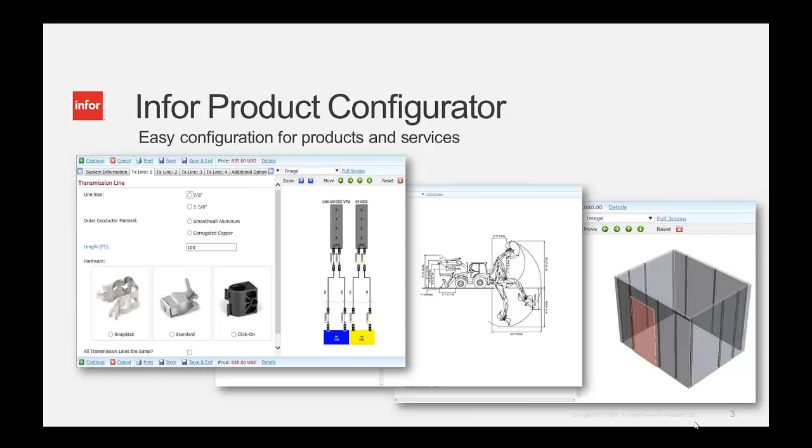The next part we'll take a look at is that the product configurator is very easy to use in the context of building models. On the right-hand side, we can see the modeling environment, where the configuration model is created to provide the presentation to the user.

In this case, this happens to be a door, and this is the example we'll use in our demonstration today. An enterprise-wide solution that provides a very easy-to-use configuration modeling environment to quickly bring new products or product offerings into the marketplace, helping gain market share.

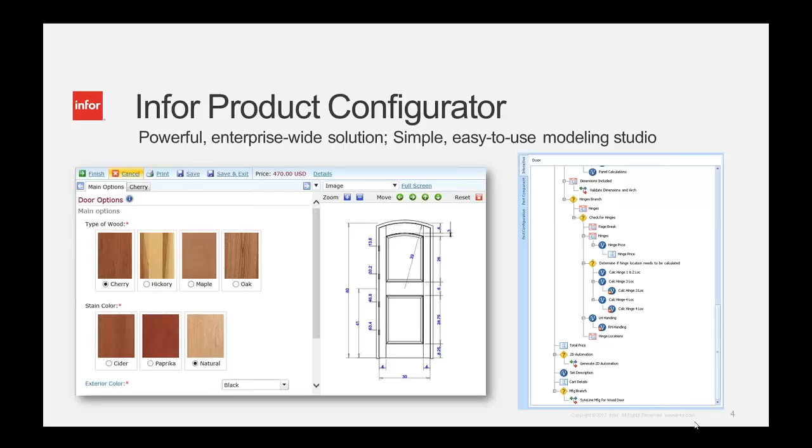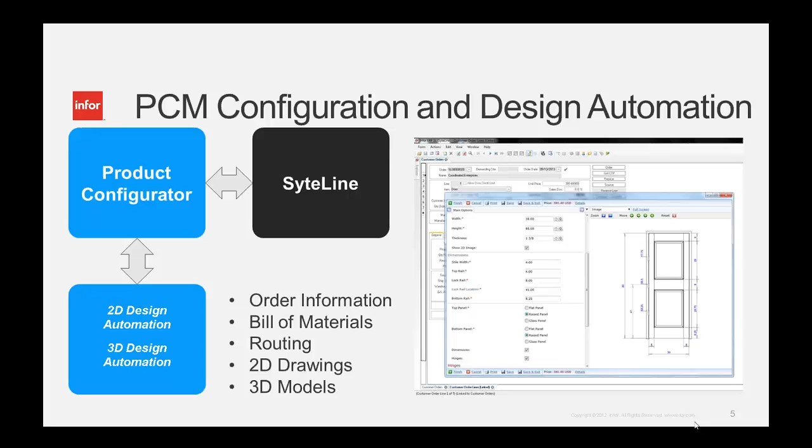Before we get into our demonstration, we'll look at how this works together. This is a limited view that we'll build on as we go. We look at the product configurator working with our design automation suite, whether 2D or 3D design, integrated with SyteLine to drive order information, bills of materials, routings, 2D drawings, and even 3D models. So in the context of ERP and SyteLine, we can leverage that configuration experience to provide accurate and complete orders into manufacturing.

Let's take a quick look at what that experience would be like. We'll take a look at our SyteLine environment, create a new order, and select Coordinated Enterprises for our order today. I'll save my order header and go into the line.

As I mentioned earlier, we'll take a look at the door. It's a really good example of a variety of different features of the configurator. As we save our line, you'll see our configure button is now enabled. Launching the configurator takes us into a very straightforward and clean user experience.

For an experienced user who really understands the product, they're able to quickly make selections and have quick visibility and accessibility to the different options they may want when quoting or providing ordering information for their customer, including the ability to change certain dimensions and attributes related to that configuration.

As we finish this up, a very quick experience for a pretty simple product, just to illustrate a few capabilities here, we're going to generate a job as a result of that configuration. We'll see the job comes up, but we're also generating the price - the as-configured price - and with that job we'll take a look at the job information.

Here we can see it was able to generate a list of operations, and within those operations, a list of material. This happens to be the various pieces of wood that need to be cut to assemble or manufacture that door, plus some additional items such as glue.

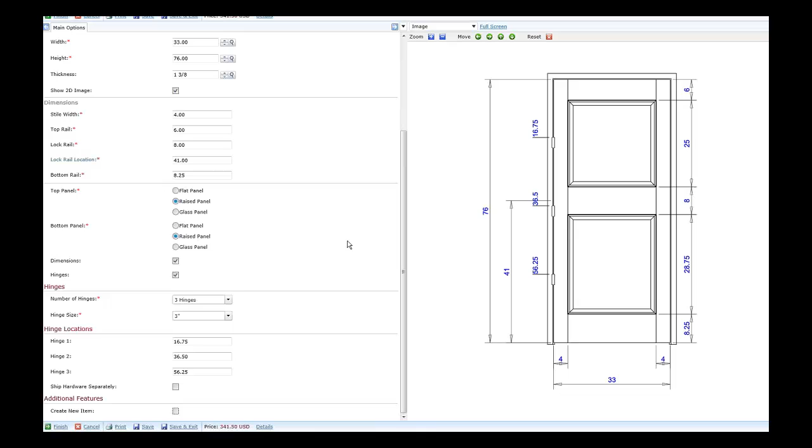Again, the CAD model is driven through the configurator, so there's one model that, through the configuration options associated with it, is able to dynamically generate and adjust the model and output that drawing as configured. So as I finish this configuration, we'll come back in and provide them the job.

It's going to now represent, as we take a look at the job details, the hinges that were added to that door. So we can see the integration with the manufacturing side, and as we look at the assembly, we'll see we now have our hinges associated with this particular job.

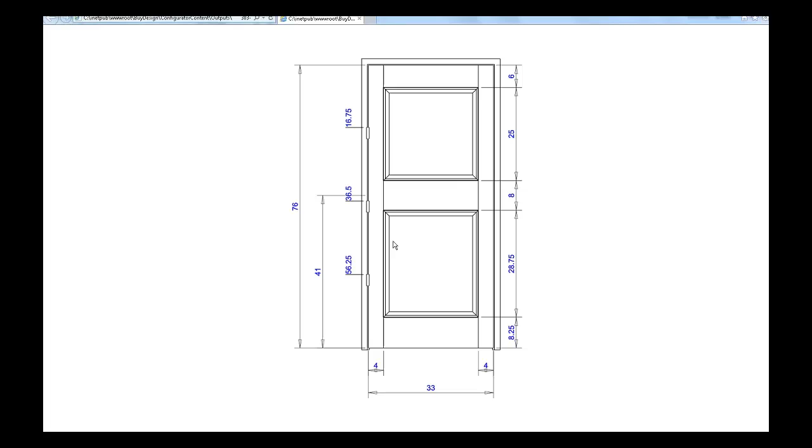And then if we were to look at the notes associated with this job, we can take a look at that image, and it's going to be the same image we saw during configuration. So again, just another excellent way to validate that what we're configuring is what we're actually expecting to get, by a visual confirmation of that configuration.

So that's a pretty standard, typical view of a product configurator working in the context of ERP—being able to select the different features associated with the product, being able to drive pricing, being able to drive manufacturing.

I think one of the things that makes our product configuration management suite a little bit unique is we have some additional capabilities. One of those being the 2D design automation, which allows you to see an as-configured drawing of the product that is being ordered.

But let me ask a somewhat rhetorical question. What if we could take that same capability and provide it to your customers? So rather than your customer having to call in an order, fax in an order sheet, or email in a list of the things they want to order and have somebody transcribe that into the ERP system, what if we could extend that same configuration experience, but one that's much more visually engaging to your customers, allowing them to self-service whenever they need to, wherever they need to do that?

So web-based quoting and ordering, whether they're looking to quote or order in their office, maybe at home at night finishing up some work, or while on the road using their tablet or mobile device. The way we provide for that is through the Infor sales portal, multi-channel quoting and ordering for your customers as well as your dealers and sales reps—accessible via the internet through standard browsers that all of us tend to use.

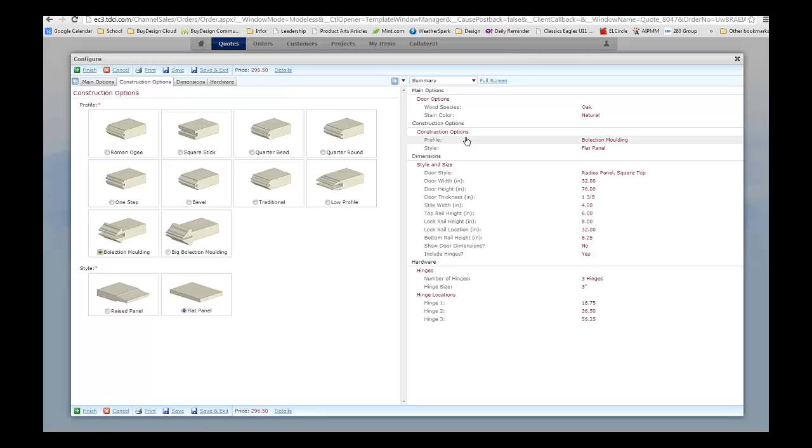And if they needed to make a change — oh, you know, I really didn't mean bolection molding, I'll click on that, it'll bring me back here, and I really want to do the Roman ogee. So we make those selections, and it's going to continue through the process to now be again at the finish date.

I've made that update. If I wanted to see if there was a change to the image, I could take a look there. Indeed, it did change that image, that profile pattern changed, so I can validate that. Again, a very visual user experience here to allow the user to be very confident that what they've configured is really what they're going to get.

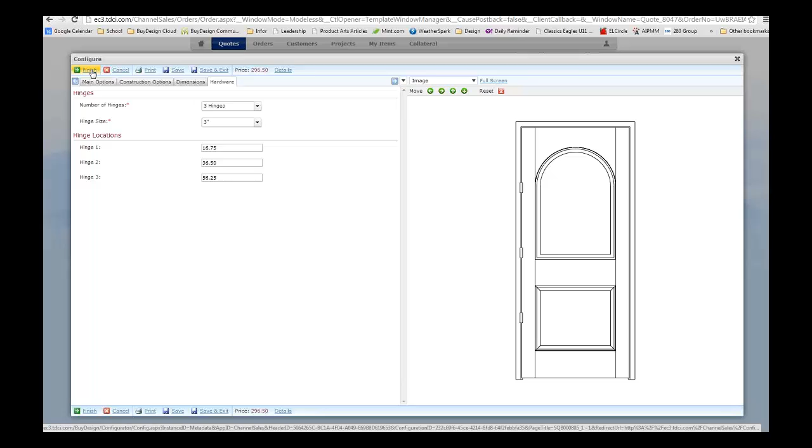So as I finish this configuration, it's going to bring it back to the quote, and you can see it returns some additional information that describes what was actually configured. So here are some of the configuration options, as well as the price and the image associated with that.

So that was one way to think about configuration — a very detailed configuration experience, similar to but yet very different than what was done in SyteLine. We launched into a session to select options, and as a result generated a price as well as an image.

Now, as maybe a more experienced user, as I begin using the system, I become more comfortable with the product line. I've also realized that not everything I configure is very unique and detailed. I may be able to complete some of these configurations through what I'd call standard offerings.

So the manufacturer says that here are the things that might change most often. Here's a little additional tooltip — selecting the wood affects the stain options — but it allows the user to very quickly configure standard offerings. So it's still configurable, but the remaining options are going to be defaulted.

So we saw additional options in detail that we don't see here, but because it's a standard offering, we're not going to allow the user to make those selections. Again, still very visual if they need to go ahead and do that. And we'll choose hickory here in this case, with a natural finish.

And as I add these options in — so this we say 32 by 74 — I can click Add. And as I click Add, it's going to actually do that configuration in the background, and it's going to complete and show those attributes as configured with the pricing and the image as it's been selected.

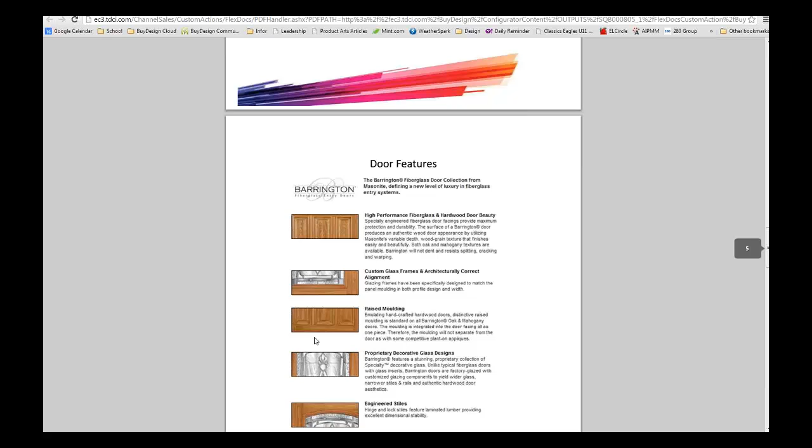And then as we look at the configurations related to the quote that was configured, we have that information there. We have the marketing material with the door features, we have the terms and conditions, and warranty information related to the product. So this is just an example of how document automation can be used to generate a proposal. Document automation could also be used to generate an engineering submittal package.

It might be hundreds of pages long where there's lots of drawings associated with it, a lot of different specifications, pulling information from different systems. A lot of different ways to use document automation. This here is just an example of generating a proposal.

So say now that we've generated that proposal for the customer and the customer says, hey, that's great, I appreciate it, but I really need to get another view of this quote. I need to be able to see this quote, and I want to standardize on maple, on a natural maple finish, and where I'm selling this into, they said they just want a traditional square top, square panel door.

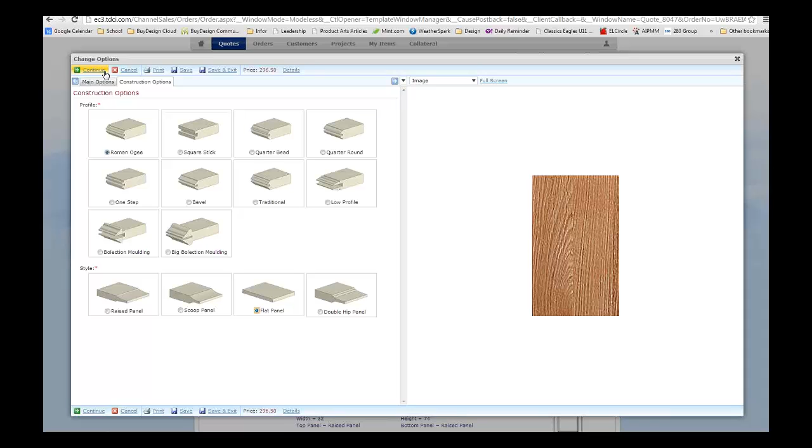Okay, so we could do that by going into each line, and we could change the options for each one of those to be able to provide what the customer ultimately was asking for. So we can do the square panel, square top. I can come back here, so it allows me to go in multiple ways, right? Maple, and then I want to do natural, and just confirm the selections.

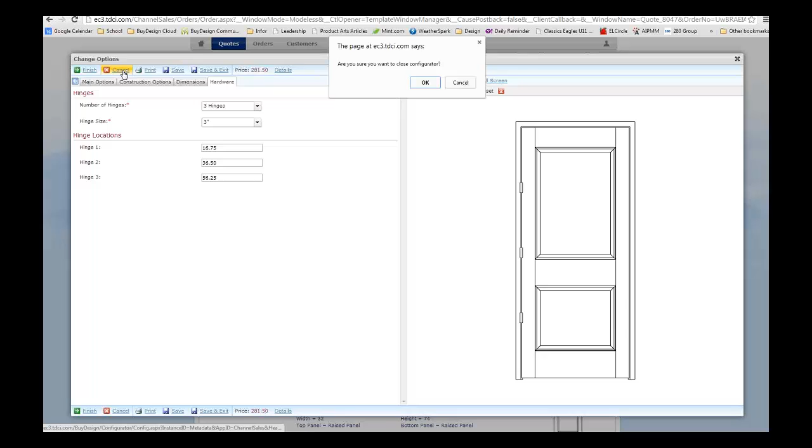And so again, I can go back and forth through the process to be able to make those changes. I'll go ahead and cancel it, but that would take a long time to go through each one of those doors and have to make each of those changes independently. Not only that, I'm losing the integrity, if you will, of what I had quoted them previously. What if they change their mind?

So we have an easy ability here to be able to create a new version. So let's just call this one here the original. So this is the original quote, and we'll just version that. Okay, so as we version it, we're not going to lose the quote number. We're actually going to just build on it. So here is the quote 805-2.

That's for my second version, and this one here will say square panel. We'll call this one the square panel, and again, I could go through and change each one of these independently, but rather than do that, we'll go ahead and use what we call a rapid change. And really the benefit here is the ease of use and also the speed.

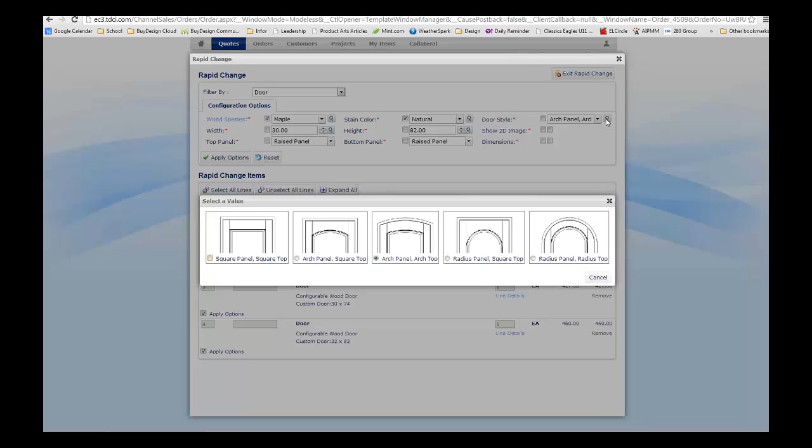When we can provide for a very intuitive user experience, one that allows a user to make the selections very quickly and very easily, and get that done with a high level of confidence, then that's the experience that's actually going to win business. So there's the square panel, square top. We'll say apply options, and that's going to go ahead and complete that in the background.

We can come back out here. We could continue to add some additional options if we wanted to. Maybe we want to add another door here. Perhaps this one, again, we want to keep it consistent with the maple and natural, and we could add another one in.

So again, that's going to put that there in the background. Now I have really two versions of the same quote, all now updated. You can see all these are now the square panel doors. Some of them have different dimensions associated with them, 32 by 76, 32 by 74. We can see that the lock rail location is a little bit different on line 1 versus line 2.

This quote happens to be for $1,415, whereas if we wanted to switch back to version 1, we can take a look at that one as well - that's $1,437. So we can see now how we have two versions of the same quote to be able to satisfy the need of the customer as they go through the process of really determining what it is that they need to order.

So this is, again, a great example to show the flexibility as well as the ease of use and the power of extending the configuration capabilities outward to your customers, so they can interact with their customers or just with you directly from a reordering standpoint, just to be able to get very accurate and complete configurations and pricing from you without having to call upon customer service. So all the information contained in the configurator accessible through the sales portal, via a browser, is a really powerful option for your customers.

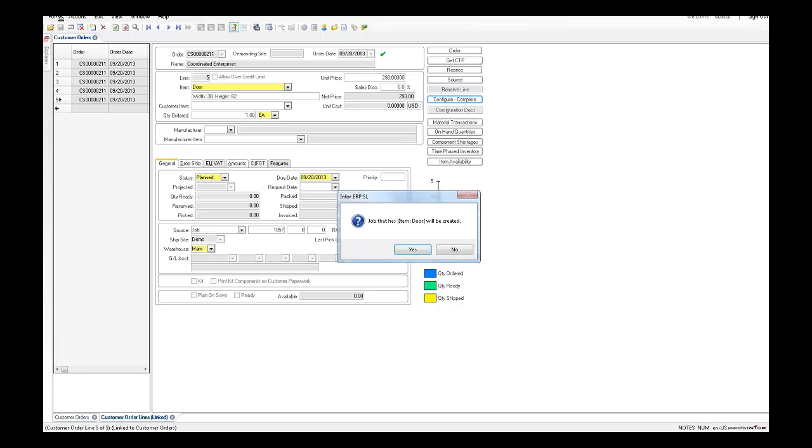So we'll go ahead and add hinges to that. And not only that, the customer had asked, well, could you ship those separately? Well, absolutely - let's go ahead and ship that separately here, and we'll finish that up. But they just wanted it on that one particular line. They said, hey, I needed that one to be updated so that I have special processing for that, where I'm going to place it in this particular project.

So as I did that, you may notice that we now have line 6. So the configurator is able to drive additional lines being added in this context for the hinge of a stock product. And you can see then if we went and looked back again at the job associated with this particular door, that it will also have been updated to show - it's the same process, right - because the hinge is being sold separately, it's not going to actually add it to the bill of material here.

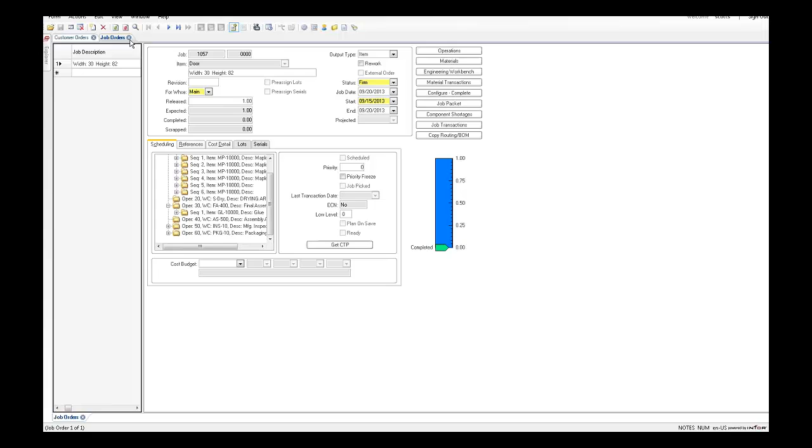So as we take a look at that, we'll go through the different operations and materials associated with the job. As I've done the reconfiguration in the context of SyteLine, I've been able to update the job accordingly. If we need to look at the detail to make sure it's correct, we have the configuration notes associated here, and we also have the image to validate that it actually has the hinges as we expected.

So that really gives, if you will, the round trip, the full exposure to product configuration management.

So if we jump back into our slides to wrap up, the complete solution is not just a product configurator integrated with ERP. Tremendous value there, in being able to launch configuration from ERP, standardizing your product offerings, making sure only valid options are driven down into manufacturing, reducing costs significantly through eliminating rework and scrap.

And significantly reducing costs associated with manually chasing down acceptable combinations of offerings. So great value there, certainly extended with the automation suite, specifically 2D automation and even 3D automation. We didn't show that today, but really the only difference is that instead of a 2D sketch, it generates a 3D model, and that 3D model can have a tremendous amount of intelligence that can drive downstream manufacturing operations.

But if we look at the full solution in the context of extending that outward to your customers, taking the power of the configurator and providing it to your consumer, your dealer, your sales rep out in the field to use where they want to use it, that provides a great opportunity to increase sales.

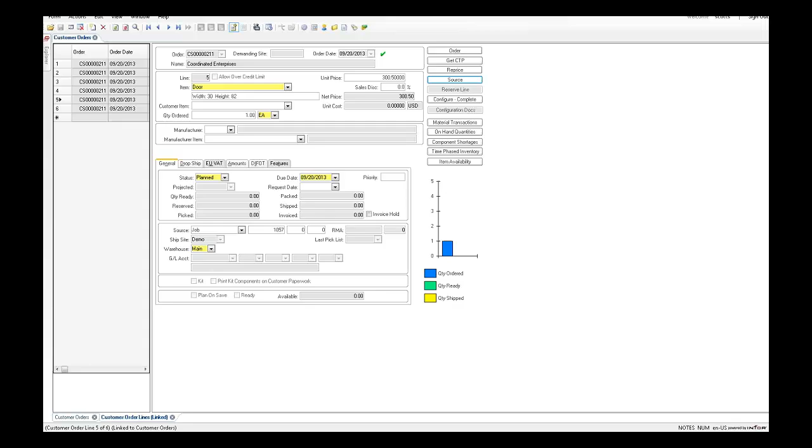And it's possible to disassociate job creation from the order? Oh, absolutely. If I just jump back in here very quickly, we have a branch down here in our model that says to go generate the manufacturing. You can just disable that, and you'll totally eliminate the generation of a job. It's really as easy as that.